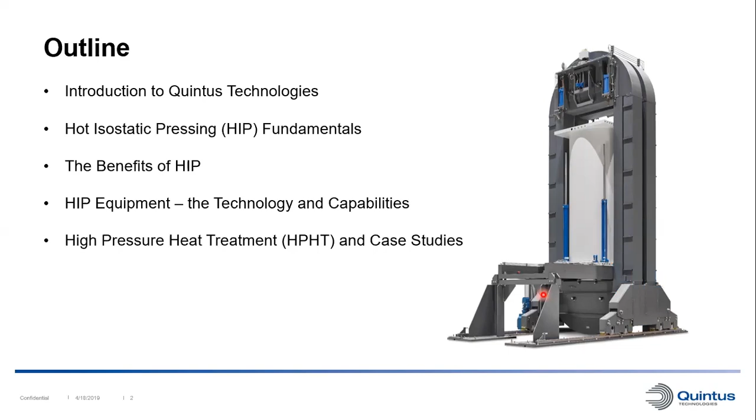As a background, I first want to do a short introduction to Quintus Technologies. Here is the history of the company. Our operation started in 1940 when a department for high pressure technology was formed at ASEA, a company that then became ABB. In 1947, ASEA started to look at how to produce synthetic diamonds, and in 1953 they were able to produce the first synthetic diamond, done in a high pressure press that also could reach high temperature.

In 1964, the technology used to produce diamonds was developed to make hot isostatic presses and cold isostatic presses, and these became commercial processes. In 1984, we invented the rapid cooling HIP furnace, allowing decreased cycle time and increased productivity of your HIP unit. In 2010, we built the biggest HIP system, still the biggest in the world today, situated at the company MTC in Japan. In 2011, we took the rapid cooling technology a step further with rapid quenching technology that achieves very high cooling rates, enabling in situ heat treatment in the HIP process.

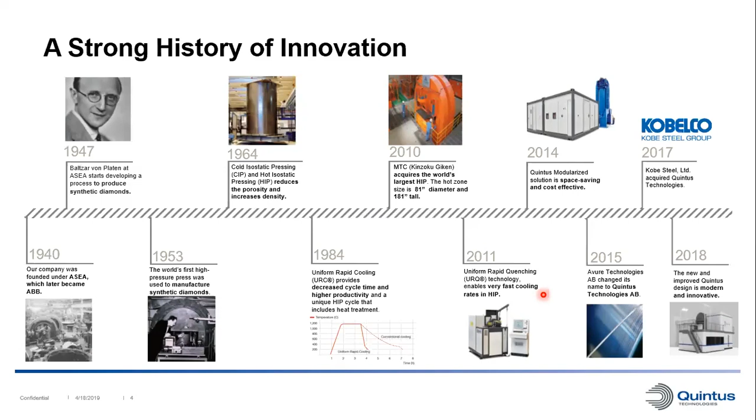Today we are around 240 employees worldwide. We have our headquarters in Västerås, Sweden, which is actually my hometown. We have a service sales office in Shanghai covering the Asian market, and a site in Columbus, Ohio, where I'm based, supporting the North American market. Our history of innovation has resulted in many patents, and of those, 120 are still active today. Since the 1950s, we have developed over 1,800 high-pressure systems.

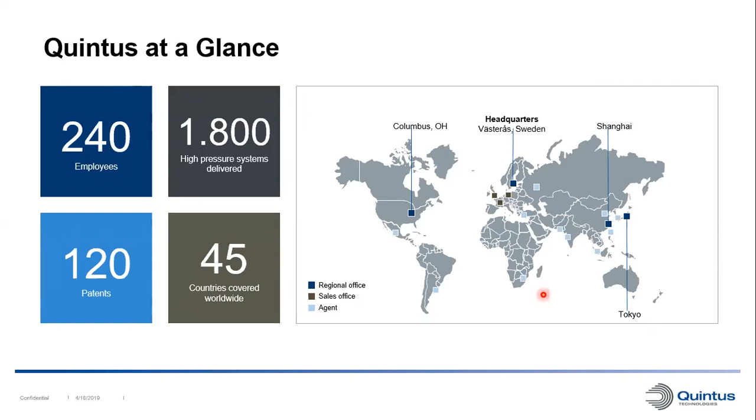Here we can see the main markets we work on regarding hot isostatic pressing. The aerospace industry is a big market for us — a lot of the components in turbine engines are HIPped, for example turbine blades. In the automotive industry, HIPping is used for structural parts, for example cast aluminum engine blocks, especially for high-performance cars and racing applications. In the energy sector, HIPping is used for nuclear components and also components for oil and gas.

In the same way HIPping is used for turbine engines for airplanes, it is also used for industrial gas turbines for power generation. In the medical field, we have medical implants such as knee joints and hip joints, which are often HIPped because it improves the material properties and reliability of those components, which is important.

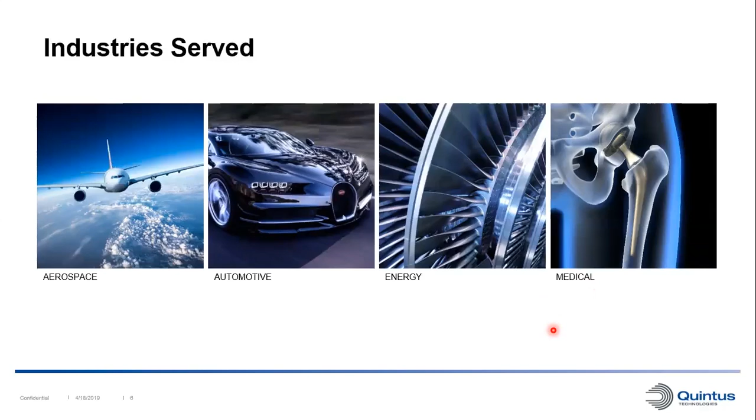Now going into the technology of hot isostatic pressing. There are a few different applications for HIPping, and one of them is consolidation of powder. This is where you produce a near-net shape component or just billets by encapsulating a powder and HIPping it to 100% dense material. This is commonly done for stainless steels, tool steels, high-speed steels, but also other materials.

Diffusion bonding is another application where similar or dissimilar materials can be bonded together in the solid state, so there's no melting in this process. You can bond a solid to a solid, also clad a powder to a solid, and also do powder to powder compounds.

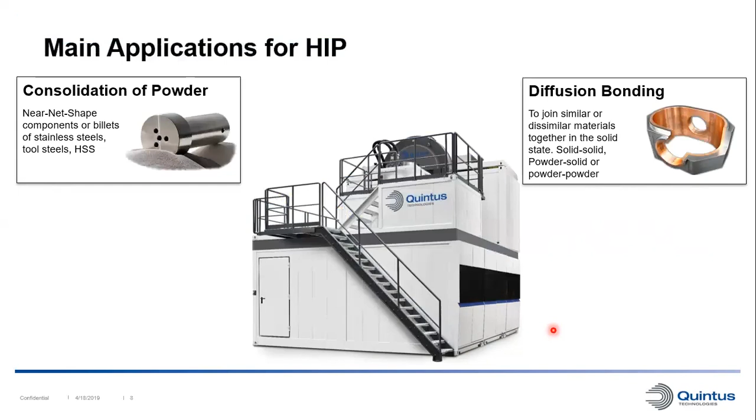The third main application for hipping is densification of products. This is commonly used for casting, additive manufactured materials, or sintered materials, any material that contains some kind of internal defects that can be eliminated. This is the application we will be focusing on today.

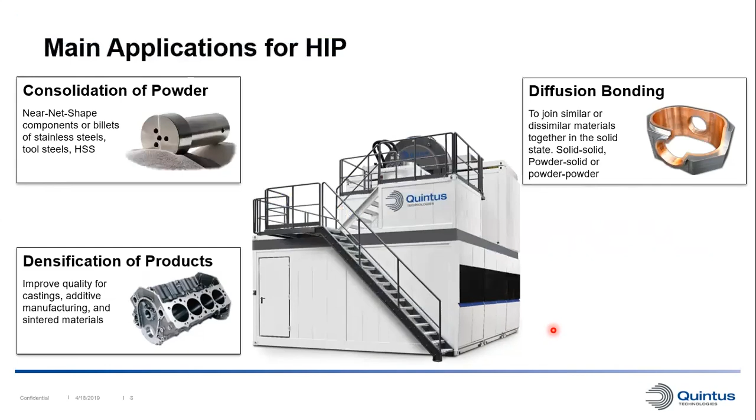So the definition of hipping is to apply a pressure distinctly higher than the yield strength of the material at the hip temperature. It is a process with high temperature and high pressure. We can go up to 3,600 Fahrenheit and 30,000 PSI. At this high temperature, the yield strength of the material will be very low.

So the stresses we induce in the component with the pressure will actually be higher than the yield strength. As we know, when we have higher stresses than the yield strength, the material will plastically deform to, for example, collapse internal pores in castings. So the mechanism working during the process is mechanical deformation.

But we don't only want to collapse the pores, we want to completely metallurgically heal these defects. That is where creep and diffusion come in, to completely erase these defects from the microstructure. Since creep and diffusion are time-dependent processes, that's why we have a soak time in our hip cycle.

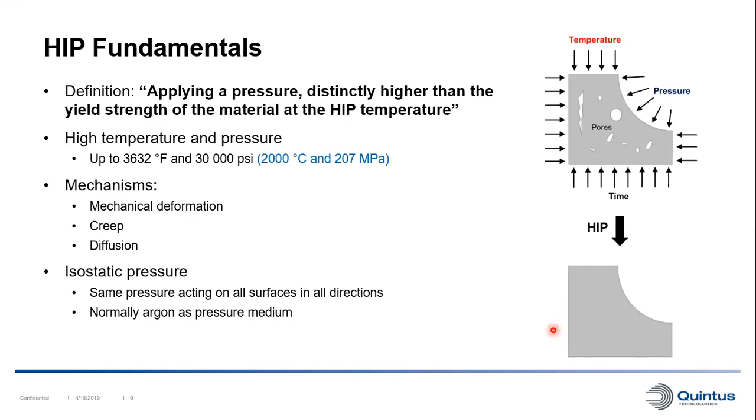Isostatic pressure is when you have the same pressure acting on all surfaces in all directions on an object. For the hip process, this is normally achieved using pressurized argon gas as the pressure medium.

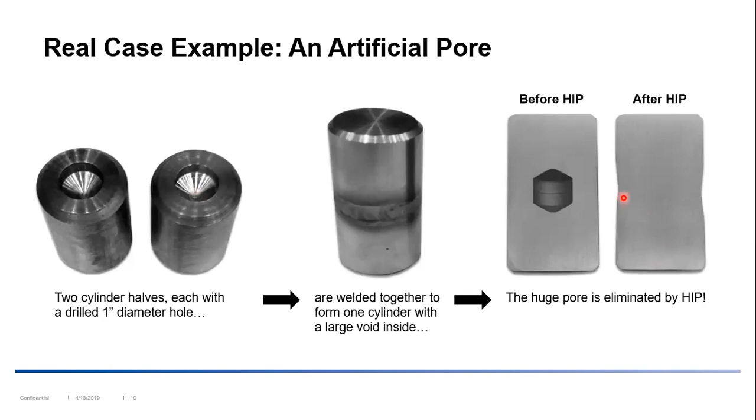Since the pore is relatively large compared to the sample size, we can also see some macro deformations on the sides here.

Here's an example of a real casting porosity microstructure. We can see some typical casting porosity, and these type of defects can also be eliminated by the HIP process.

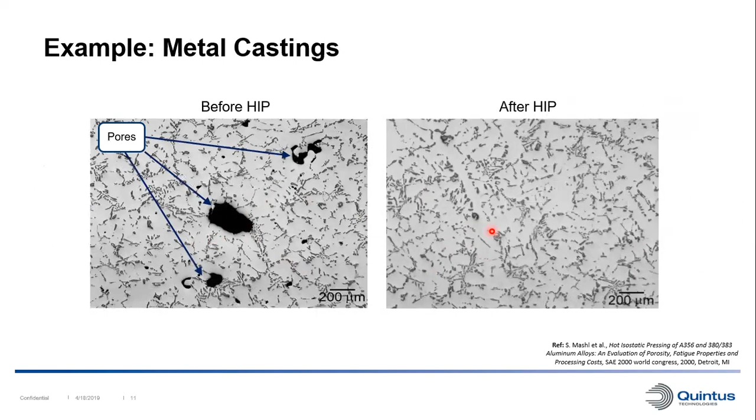One thing to notice is that it is only internal defects that are eliminated with the HIP process. Any surface-connected feature where the pressure media can penetrate will not be affected by hipping. For example, a surface crack - the pressure media will just go into the crack and there will be no net force to close that crack. Also, a rough surface will not be affected by the HIP process.

So a gas-tight surface of the component is a requirement for hipping, and this is normally not an issue for castings, which is a good thing.

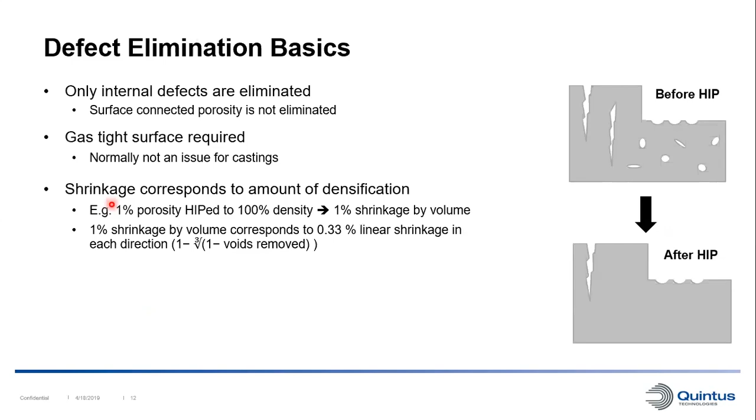The shrinkage we get in the process corresponds to the amount of densification we achieve. So if, for example, we have 1% porosity and we hip that material to 100% density, we will get a shrinkage by volume of 1%. And 1% shrinkage by volume corresponds to about 0.33% linear shrinkage in each direction of your part. So it's not a lot of shrinkage in the process.

Here we're going to go through some of the typical HIP cycle parameters used. The HIP temperature is normally around 80% of the melting point, that is the solidus temperature of the material. The pressure normally ranges between 7,000 and 30,000 psi for castings, somewhat depending on the strength of the material.

For example, when I HIP ceramics in our lab here, I normally go with the highest pressure. The soak time in the process is typically between 1 and 4 hours. Most metals are sufficient with a 2-hour soak time to get full densification.

However, when we look at materials designed for high temperature creep resistance, for example nickel-based superalloys, titanium aluminide, etc., in those cases we tend to go to longer soak times, such as 4 hours, since high temperature creep is pretty much what we're trying to achieve in the HIP process.

The main purpose with HIPing is to achieve 100% density and eliminate all defects. There will be different combinations of time, pressure, and temperature to achieve this state, so there's not one unique cycle per alloy. There will be different options, and which of those is best might be determined by other factors.

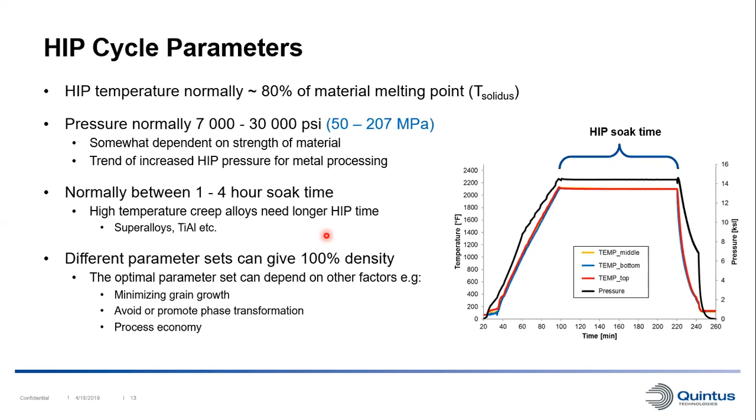For example, if we want to minimize grain growth in our process, we would choose as low a HIP temperature as possible and as short a soak time as possible, compensating by maximizing the pressure. Another example is if we want to avoid or promote a phase transformation during the HIP step, then we adjust our HIP temperature accordingly. It can also just be process economy - maybe we want a cheaper cycle that will still achieve 100% density of our parts.

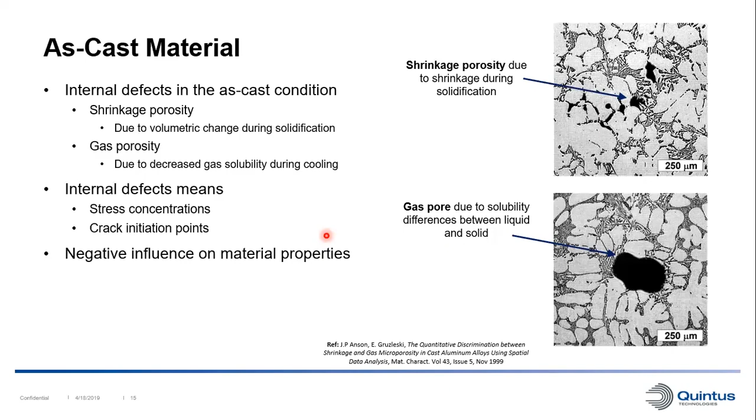Now I want to cover some of the benefits of hot isostatic pressing. As-cast material typically has internal defects, such as shrinkage porosity due to volumetric change during solidification. Gas porosity is also pretty common due to decreased gas solubility as the melt cools and solidifies. These internal defects act as stress concentration and crack initiation points in the material, which can negatively influence material properties.

So the main purpose of HIPing is to eliminate these defects - we eliminate the stress concentration and crack initiation points and get improved material properties. The typical properties we see improvement in are ductility and fracture toughness, better creep properties, and especially improved fatigue properties.

Since there's natural variation in porosity - in amount, size, shape, and position - between different castings, we see variation in properties. But since we're eliminating these defects with the HIP process, we typically see reduced scatter of properties with HIP. HIPing can also improve the quality of machined and polished surfaces, since there's no internal porosity that can appear at that surface. This is important for corrosion properties, optical properties, and aesthetic properties.

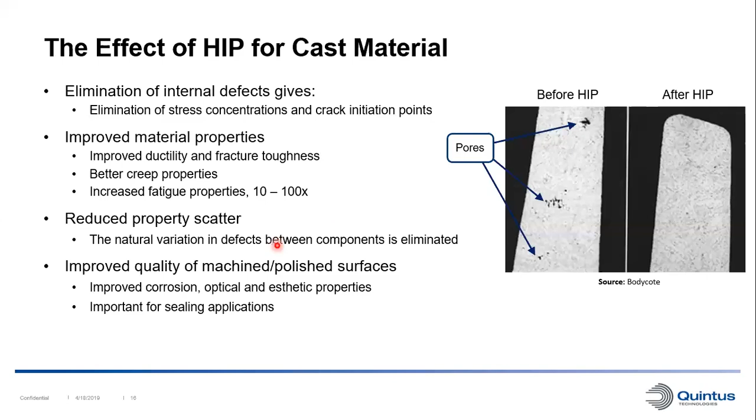For example, HIPing is actually used within the jewelry industry, where they HIP precious metal castings to achieve very perfect surfaces, because that's a requirement in that industry. So they don't use HIPing for mechanical properties, just for aesthetical properties. Having good machined and polished surfaces is also important for sealing applications, of course.

Here we have an example of the typical effect of HIPing on fatigue properties. In the diagram on the right, we see fatigue data for a cast aluminum alloy, A206, which has been cast and then heat treated with a T71 treatment. We have variants with and without HIP - there were 10 specimens per condition tested at one stress level, 24 KSI.

We can see the number of cycles to failure on the y-axis. On the left, in green, is the material that's been cast and then heat treated, so no HIPing. Here we can see the specimen that produced the minimum amount of cycles was around 6,000 cycles, and the average life was around 21 to 22,000 cycles.

On the right, in blue, we have the same material that's been HIPed and then T71 treated. Here the minimum value is over 200,000 cycles, and the average life is around 2 million cycles. So we get over 30 times higher minimum value with HIPing, and over 90 times higher average value with the HIP material. This is one of the main reasons HIPing is used for castings.

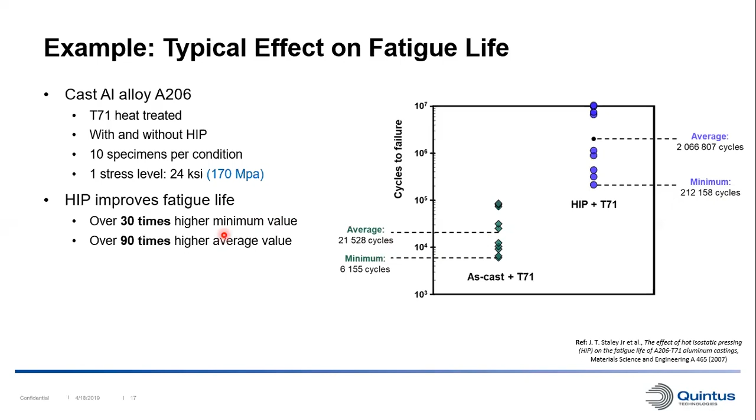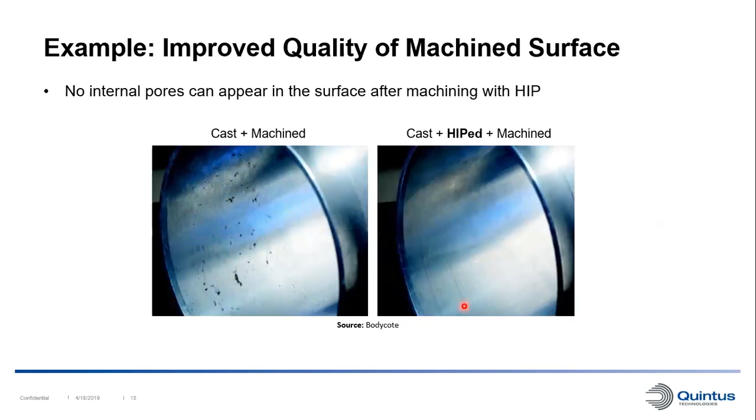Here's an example of improved machined surfaces with HIPing. On the left, we have a cast tube that's had its inner surface machined, and as we can see, it's revealed quite a lot of internal porosity - not optimal. On the right, we have the same type of cast tube that's been HIPed before it was machined, and as we can see, we have a virtually perfect surface.

So that was the more technical benefits of the HIP process in terms of mechanical properties, etc. But what are the outcomes of these in terms of a business case? What are the drivers for using HIP for castings?

The improved material properties with HIP allow us to use higher stresses in our components, which gives us lower weight designs. We can use less material to produce our component and get the same performance and service life. Also, the reduced property scatter gives more predictive material properties, so hopefully we can use design values closer to the actual strength of the material. The engineering safety factors we use in dimensioning could probably be reduced a little, which also makes it possible to design a lighter component.

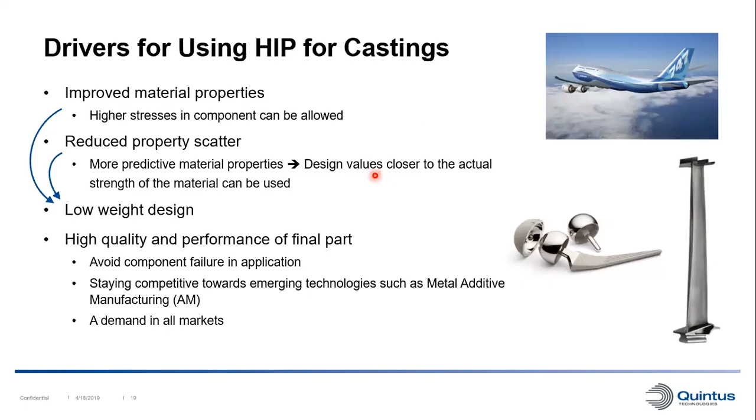Low weight design is important in today's industry since there are a lot of fuel saving goals. High quality and performance of a final part is important to avoid component failure in an application, which can be very costly and have big consequences. The most extreme example is probably a turbine engine in an airplane, but also for less critical applications it's important to have high quality. I also believe high quality and performance of cast parts is important to stay competitive toward emerging technologies, for example metal additive manufacturing, which has been growing very fast for the last couple of years and will continue to do so. That process is starting to compete with castings more and more in different areas.

More outcomes: it's very common in the casting industry to use non-destructive testing, such as X-ray analysis, to make sure internal porosity is within allowable limits. But since we're eliminating porosity with the HIP process, it might be possible to reduce non-destructive testing or even eliminate that part of the process chain, which will save cost. In the same way, if we don't have any porosity that can be outside of spec, we can also reduce scrap rates for our castings.

This is very good since we don't have to remelt, recast, and re-NDT components. The improved quality of machined and polished surfaces makes it possible to avoid part leakage in sealing applications. Also, it's very annoying to find surface porosity during final machining of a part, where all that value-adding work is just flushed down the drain when you have to reproduce the component. So all of these points have potential to lower production cost in the casting process chain. With increased quality, high performance, and potential cost savings, this is how HIP increases the competitive edge.

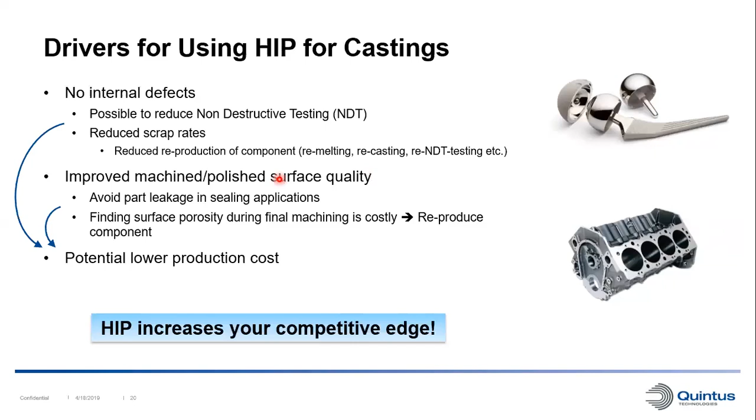Here I want to talk about an interesting approach we've successfully tested for additively manufactured material: allowing a higher percent of porosity in the as-cast, or in this case as-printed, condition. HIPing gives 100% density of the material independent of the starting density. It doesn't matter to the HIP process if you have 1% or 5% porosity in your casting - it will still reach 100% density in the end, as long as the parts have a gas-tight surface, which they do. So if we know or decide that we're going to HIP, we could allow a higher amount of porosity in the as-cast condition.

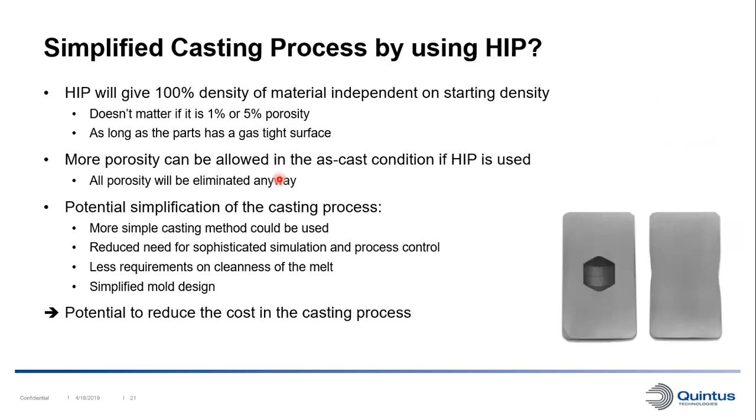This could open up the possibility to simplify the casting process. For example, maybe a more simple casting method could be used. It might be possible to reduce the need for sophisticated simulation and process control tools, reduce requirements on the cleanliness of the melt, simplify mold design, etc. So here we have another potential to reduce cost in the casting process through HIP.

Now I want to cover the sourcing of the HIP process. There are mainly two ways to acquire HIP today: either you buy the service from a HIP service provider, where you ship your parts to a site, get them HIPped, and ship them back, or the other alternative is to have the HIP operation in-house.

Looking at the HIP service provider option, this is a cost-effective alternative, especially for smaller production volumes. The HIP service provider often runs coach cycles, meaning they take components from different customers and run them together in one cycle, so you share the cost of the HIP process with other parties, making it cost effective. Also, no HIP know-how is needed, since the service provider knows exactly how to treat the material properly, and no capital investment is needed if you buy the process.

Talking about the HIP service market, there will be 3 new HIP service providers in 2019, in addition to the already existing ones. One of them is a company called Paulo. They will get a medium-sized HIP at their site just outside of Cleveland, Ohio. This HIP system will have rapid cooling capabilities and high-pressure heat treatment capabilities, and they will offer HIP and heat treatment services from this one site in Ohio.

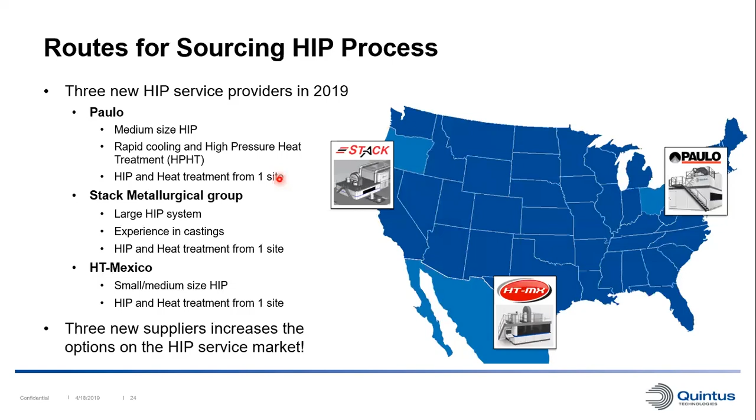provide HIP and heat treatment services out of this site in Oregon. The third company is Heat Treatment Mexico, based down in Mexico. They will have a small to medium-sized HIP that they will use for HIP and also heat treatment services from one site. So we're pretty excited about these 3 new HIP service providers, because it gives customers more options on the market.

Looking at having the HIP process in-house, that also has some benefits. First of all, it gives you the lowest cost. For example, there will be no markup from the service provider, and also no shipping is needed to any other site, which eliminates the cost for that shipping. It also shortens the lead times, which will decrease your working capital for better cash flow.

You also have full control of the process. You can plan and schedule exactly when you have to have the HIP cycle done, and you don't have to wait for a HIP service provider to do it. Also, since you're not restricted to the standard cycle of the service providers, you have the possibility to develop optimized HIP cycles for your material and your application for the best performance.

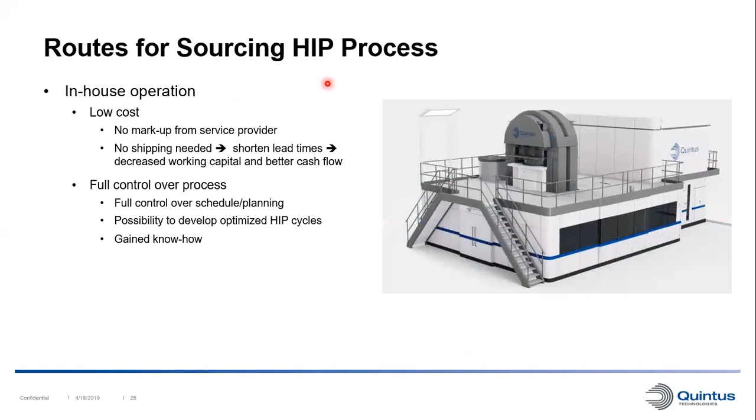Now I want to cover some information about the equipment for hot isostatic pressing. Here we can see the different building blocks of a modern HIP system, with integrated subsystems in a nice modular solution. So we have our pressure vessel, and then inside the pressure vessel, we have the furnace.

The furnace is powered by a power module, and the pressure vessel is also cooled with an internal cooling system. That internal circuit is cooled with an external cooling system.

Then we have a gas storage, which contains the argon gas used for the process. The argon gas goes through a gas module, which will pressurize the gas to generate the high pressure in the process. This is done with one gas compressor or several gas compressors.

There's a hydraulic system as well to create the movement, for example, moving the frame back and forth for opening and closing the system. The hydraulic systems are also driving the gas compressors. There's a vacuum system, so we can evacuate the air from the system before we start running a cycle.

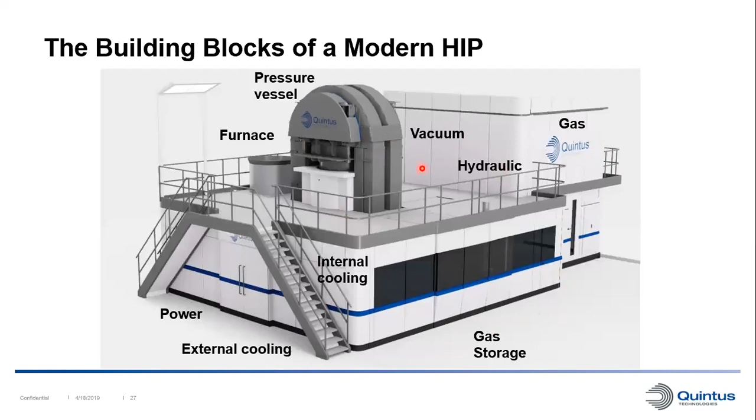So we have a relatively thin-walled forged cylinder that we put a lot of wire on with force. We actually pre-stress this cylinder and squeeze it together, so this inner diameter of our pressure vessel will actually decrease during the winding of it. This creates compressive stresses on the inner surface, and this prevents crack initiation and growth for safety reasons. So even at maximum operating pressure, there will be only compressive stresses in the forged cylinder.

Another consideration is the safety systems. There will be oxygen sensors in different parts of the HIP system to pick up any potential argon leak. There are pressure gauges and pressure relief valves in the HIP system, in different parts of the system, to have a controlled discharge of pressure in the unlikely event of an overpressure for some reason. There's also door supervision and protection covers.

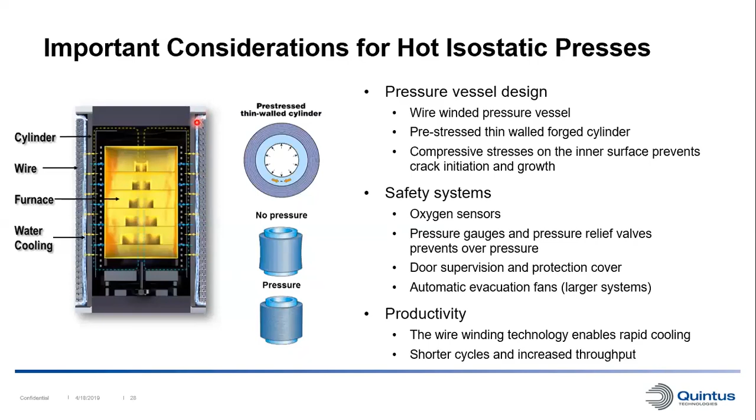This effective cooling we have enables us to perform rapid cooling in the HIP system. The rapid cooling is important because it shortens your lead times, shortens your cycle times for increased productivity, which gives you the best process economy.

Here's some details about the HIP furnace. HIPping is a batch process, and this is because of the high pressure we have. During the cycle, the system has to be closed, and we can only open the system in between cycles due to the pressure.

We have a vertical cylindrical hot zone where components are placed on different load trays on different levels and load baskets. We can see a schematic picture here on the right. This load basket and component assembly is built outside the HIP system, and then this whole assembly is lifted into the HIP furnace with a furnace tool.

There are some different furnace materials available depending on your application. We have molybdenum furnaces that go up to 2700 Fahrenheit, which can process most metals at those temperatures. But we also have graphite furnaces that go up to 3600 Fahrenheit for high temperature ceramics and refractory metals.

Since we have a high pressurized argon in the HIP process, that gives us a very high conductivity of the process gas, and that gives us a very good thermal accuracy and uniformity. So we're typically within plus minus 3.6 Fahrenheit all over the hot zone, in the entire hot zone.

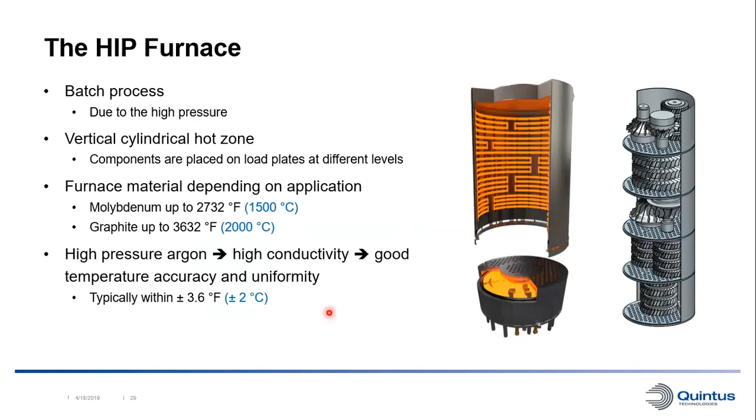Here we can see an example of the range of sizes of commercially available HIP units today. So Quintus Technologies, we have R&D and small production unit collection, which has diameters up to 14.7 inch, and they can go up to maximum temperature, and these systems can achieve up to 8,000 Fahrenheit cooling rate per minute, which is very fast.

Then we also have mid-size production units with hot zone sizes up to 41.3 inch diameters, also max temperature, and cooling rates up to around 390 Fahrenheit per minute.

Then we have large production systems that are up to 81 inch diameter. This is the biggest one we have ever built, but we can build bigger if needed. These go up to 2,500 Fahrenheit and have slower cooling rates. These very large systems can take up to 60,000 pounds of components per cycle.

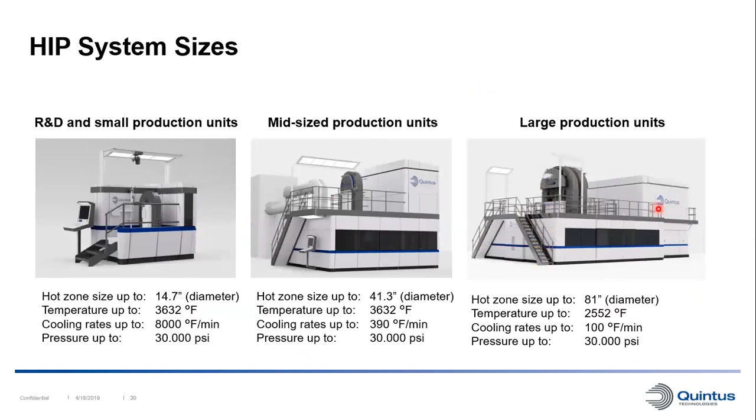Now I want to talk about something we call high pressure heat treatment. Historically, HIP systems had very slow cooling rates. The cooling was achieved just by shutting off the furnace and letting the system cool down by itself, and that could take many, many hours. Conventionally, heat treatment was not possible to do in the HIP process because of these slow cooling rates. They were not high enough to heat treat materials with good results.

However, modern HIP systems of today can achieve very high cooling rates. This makes it possible to perform in situ heat treatment in the HIP process in one cycle in the HIP system. So today, HIP systems can not only be used for defect elimination, but also to modify your microstructure for desired properties.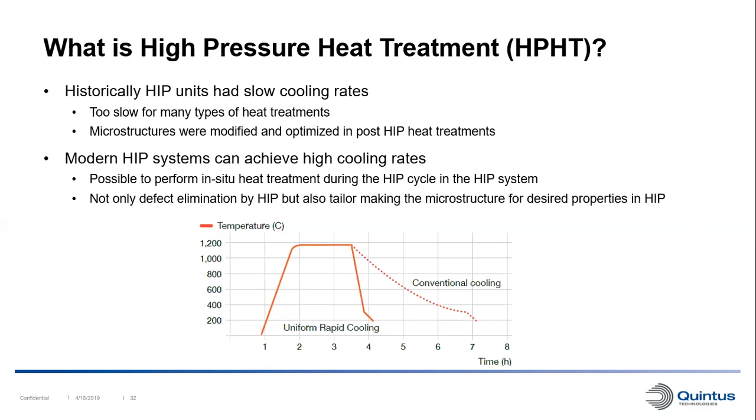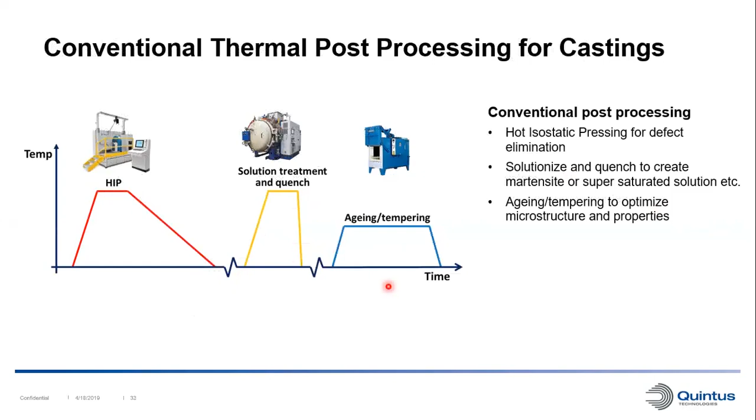Here we can see a typical post-processing route in the conventional way. For a cast component, we might have a HIP step first with a slow cooling. Then after that, we have probably some kind of solutionizing step with quenching, and then we might have an aging or tempering step after that.

The main purpose with high pressure heat treatment is to reduce the number of process steps. These conventional steps can be combined into one cycle to be performed in one equipment, the HIP. This combination of steps will reduce the total processing time, and since we're reducing the downtime between the processes, we can reduce the lead time.

Sometimes these processes, HIP and heat treatment, are done at different sites, and then you need shipping in between these steps, which takes a lot of time. Also, since we're heating up the material fewer times, we can reduce the energy consumption.

From a material standpoint, in this case, we might have a soak time in the HIP cycle of 2 hours, and then a 2-hour soak time during the solutionizing step. If we combine these two steps together, we only have 2 hours at temperature instead of 4 hours at temperature. This can be quite important when it comes to minimizing grain growth, for example.

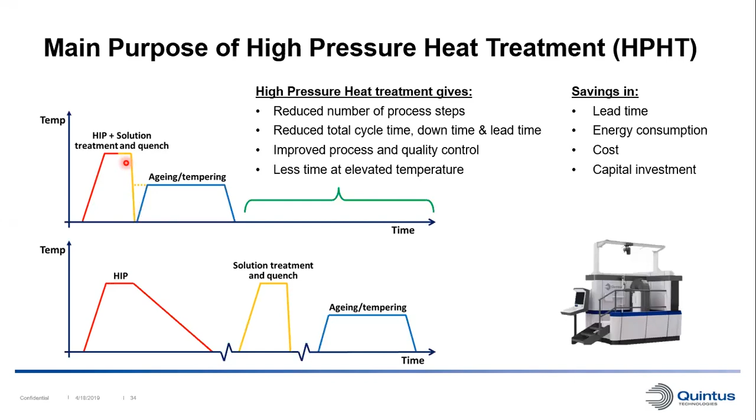Here we can see an example of high pressure heat treatment. This is for a cobalt chrome material, and this specification I've taken from a material supplier website, actually Arcam's website, a 3D printing company website, but it makes a good example. Here are the recommended post-treatments of their cobalt chrome parts.

First, they recommend a HIP cycle at 1200 Celsius at 100 megapascals for 4 hours. Then after the HIP step, they recommend a homogenization step at a very similar temperature in vacuum, also 4-hour soak time. And then they have a requirement on the cooling rate.

This required cooling rate corresponds to 105 Fahrenheit per minute, and the purpose of this is to avoid carbide formation in the material during cooling. 105 Fahrenheit per minute is easily achievable in a modern HIP system, so it would make very much sense to combine these two steps together to do one cycle in one equipment and spend 4 hours at temperature instead of 8 hours at temperature.

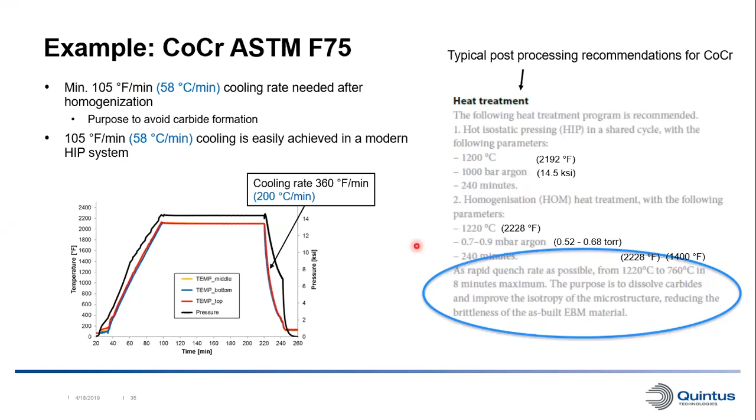It's not only the fast cooling rate that can be achieved in a modern HIP system, it is also a very flexible type of heat treatment. You can build your heat treatment recipe with infinitely many heating, soaking, cooling, quenching steps, etc.

We can see an example here. This is actual log data from a HIP cycle where we have combined the hipping and the hardening for a tool steel. We increase the temperature and pressure as a normal HIP cycle, have our typical soak time, then increase the temperature just a little before quenching down to room temperature. Then here we have a 3-time tempering as well for this particular material. So it's a very flexible system to do heat treatments in.

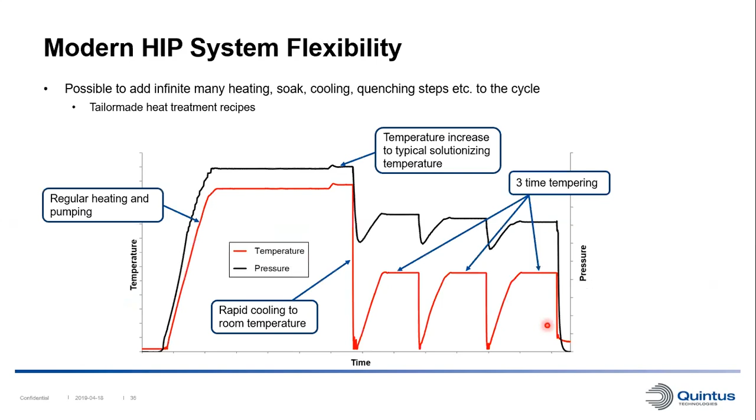Some of the benefits with high pressure heat treatment: one thing to notice is that the high pressure in the process remains during the cooling and quenching. Since we have this high pressure gas, we also have a very high density in the gas, and this gives us a very high thermal conductivity in the pressure medium, and a very high heat transfer between the components and the process medium. This is very good when it comes to heat treatment.

Also, the components and the pressure medium start at the same temperature when we are performing our heat treatment. So we start cooling the pressure medium, and then the components will follow. It's a little bit softer quenching compared to a water or oil bath quenching, where you have this initial thermal shock in the beginning. So with this process, we get low thermal gradients, low thermal stresses, and a low risk of crack and distortion during the quenching of our parts.

The HIP furnace is just one chamber. There's no heating chamber and quenching chamber, everything is done in one chamber. So there's no movement of the parts during the process, and this makes it pretty easy to monitor the temperatures during the cycle.

This is a setup in our smallest furnace in our lab in Sweden. Here we have a relatively large sample compared to the furnace, and here we can see that I put thermocouples in the gas around the component. I have one thermocouple on the surface of the component, and I've also put one thermocouple in the center of the component here with this drilled hole. So it's very easy to monitor the temperature in different parts of your component for process validation and research, etc. You know exactly what cooling rate you had in different parts.

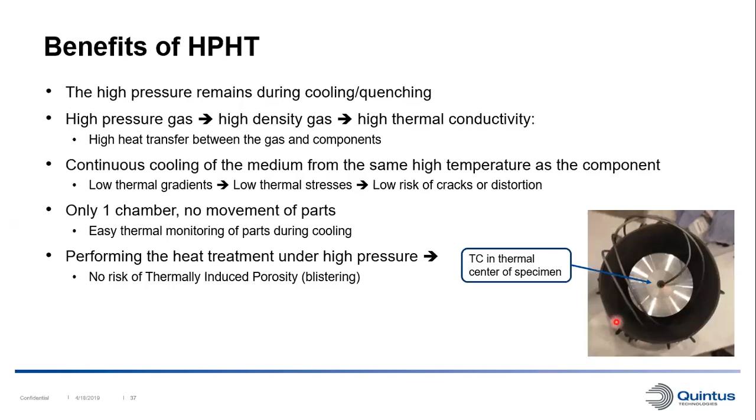Also, since we're performing the heat treatment under pressure, there's no risk of thermal induced porosity or blistering of your casting.

Here are some examples of common materials suitable for high pressure heat treatment. So we have our steels, which are stainless steels. We can have the 17-4 PH precipitation hardening steel. We have stainless steel 420, martensitic hardening steel. We have tool steels, maraging steels, duplex stainless steels.

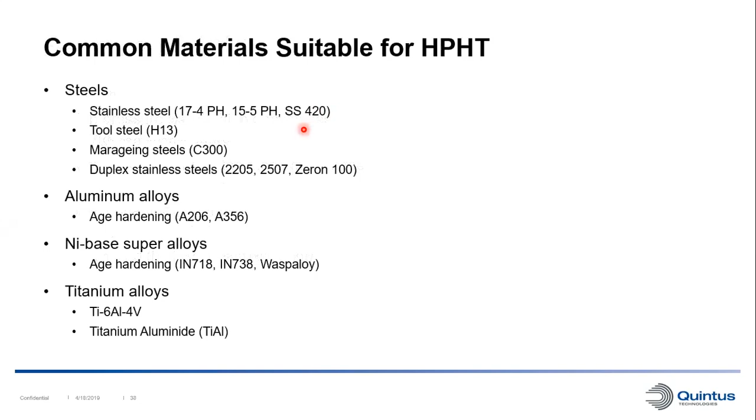Also aluminum alloys, they're typically age hardening, can be produced. The nickel-based super alloys are common for age hardening, for example Inconel 718, Inconel 738, and Waspaloy. And then we have titanium alloys such as Ti64 and also intermetallic titanium aluminide.

Now I want to show a case study for high pressure heat treatment, and this is the effect of high pressure heat treatment on creep properties for nickel-based single crystal casting. This study was performed by Ruhr University of Bochum in Germany. This university has a HIP system from us with the very fastest quenching capabilities, and they were looking at a single crystal alloy called ERBO/1, which is similar to CMSX-4.

In this study, they looked at two different variants. They looked at material that was heat treated in the conventional way in a vacuum furnace, and they also looked at the combined HIP and heat treatment step for this material with rapid cooling in the HIP. Then the density, microstructure, and creep properties were evaluated.

Here we can see the parameters for the conventional heat treatment. We have a solution annealing for 6 hours, then we cool down to room temperature, and then there's an aging first at the higher temperature for 4 hours, and then at the second temperature for 16 hours. The cooling rate achieved in this gas quenching vacuum furnace was around 270 Fahrenheit per minute.

We did the same type of treatment in the HIP system, with the difference that here we have the pressure at 15,000 psi. Also the cooling in the HIP system was around 2,700 Fahrenheit per minute, so much faster cooling than in the vacuum furnace. We can see the log data from the combined HIP and heat treatment cycle here in the diagram to the right. So we have our solutionizing, cool down, first aging, and then second aging.

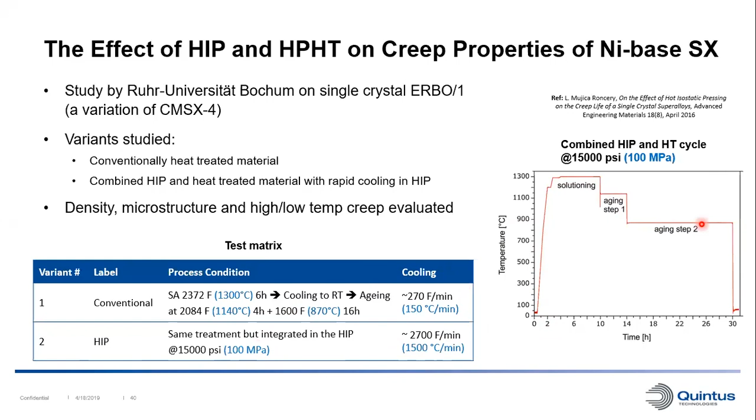Here we can see the results in terms of porosity. As expected for the heat treatment only variant, we still have the casting porosity in there, around 0.25%. And the HIP and heat treatment variant, we can't see any porosity here, which is also expected with the HIP process.

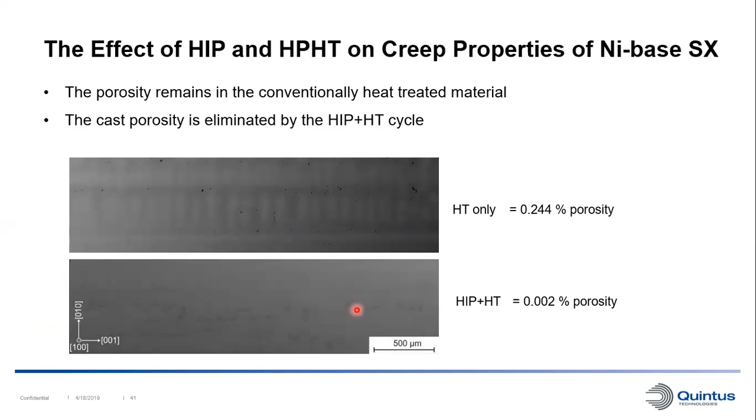Here we can see the results in terms of the microstructure. We have the conventional heat-treated variant on the left and the combined HIP and heat-treated variant on the right. Both variants have the same gamma prime volume fractions, around 75%. But we can also see a difference here: the gamma prime microstructure for the combined HIP and heat treatment cycle is much finer. This is due to the faster cooling in the HIP after solutionizing compared to the cooling in the gas quenching furnace.

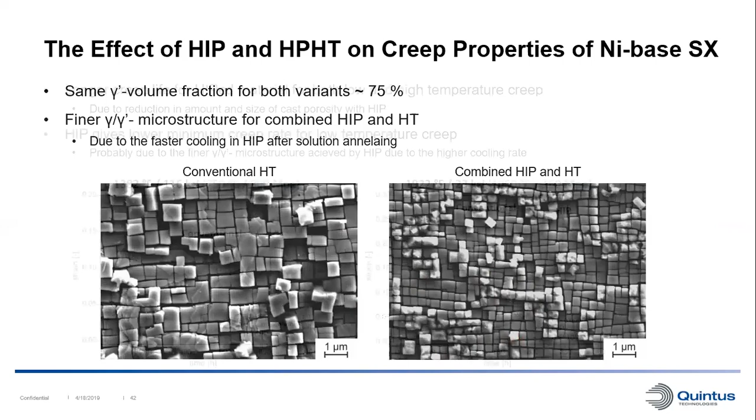Here we see the results of the creep properties. They tested two different conditions, one with a lower temperature and higher stress, and one with a higher temperature and lower stress. In both cases, we can see that the HIP variant has a longer creep life than the conventional heat-treated variant. This is due to the elimination of the cast porosity in that material.

We can also see, looking at this graph, that the HIP and combined HIP and heat-treated variant have a lower minimum creep rate than the conventionally treated material. This is thought to be due to the finer gamma prime microstructure achieved by the higher cooling rate in the HIP.

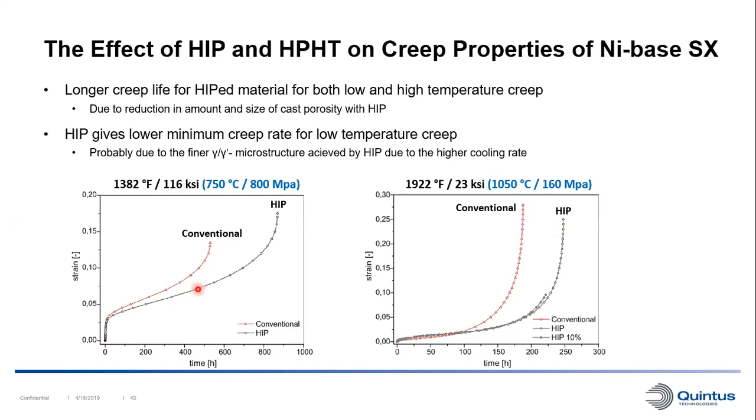Another case study here is for a combined HIP and T6 treatment, an age hardening process for an aluminum alloy. This study was done together with the Technical University of Munich in Germany.

Here we wanted to see if we could incorporate the T6 treatment into the HIP process for a cast A356 material. The purpose of this is to reduce process steps in your process chain. And the question is whether we could achieve the same material properties with heat treatment in HIP compared to a conventional heat treatment with water quenching.

In the matrix down here, we can see the different variants. We had one as-cast variant, we had a variant that was cast and then conventionally heat treated with water quenching, and then we had a material that was conventionally HIP'd and afterwards conventionally heat treated with water quenching, the full heat treatment.

The fourth variant was a combined HIP and heat treatment where we performed everything in the HIP. We can see the log data here from that HIP cycle, where we have our combined HIP and solutionizing step, then we quench down to room temperature, and we also do the aging in the HIP.

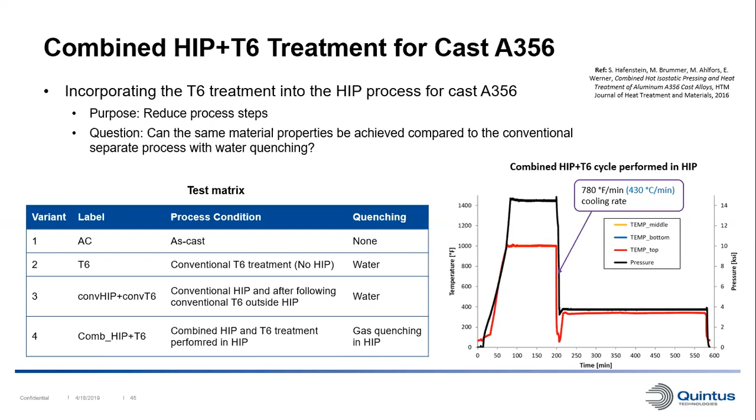Here we can see some info on the process parameters. The testing that was done included density measurements, hardness measurement, tensile testing, and fatigue testing.

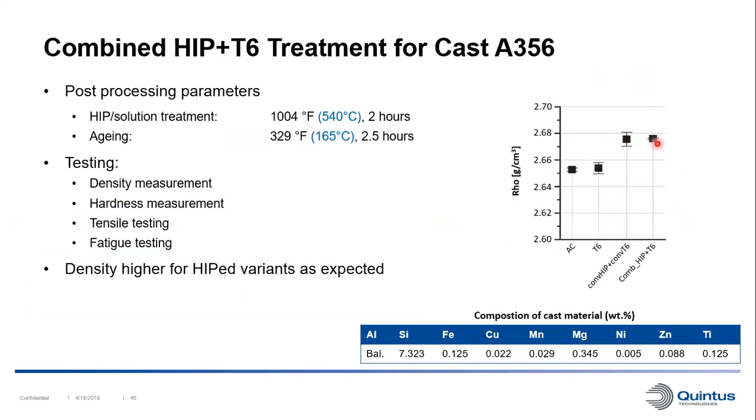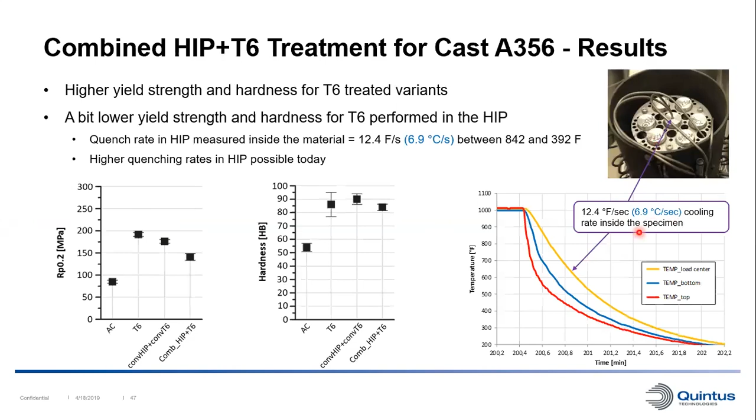So we can see the cooling rates that we achieved in these specimens for that HIP cycle. However, this study was performed 5 years ago, and since then we have developed our furnaces even further, so today we can achieve significantly higher cooling rates than this. I believe if we would redo these trials, we would get this strength up a little bit.

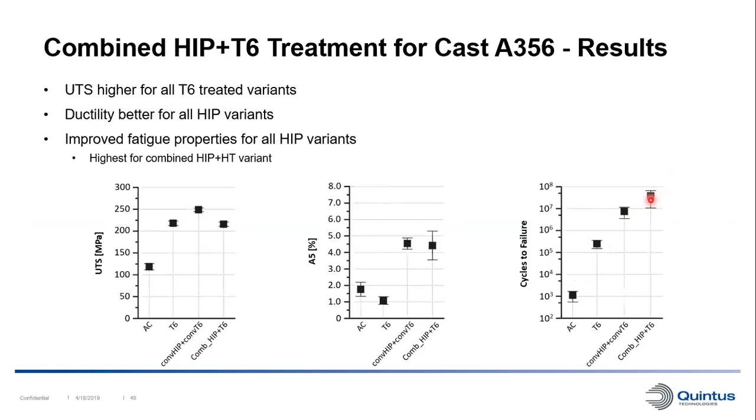Also, as expected, we see better fatigue properties for the variants that have been heat-treated, and also the hipped variants here are higher than the just heat-treated variant. Interesting here was that we actually got better fatigue properties of the combined hip and heat treatment variant, even though it had a little bit lower strength than the conventional hip and heat treat variant.